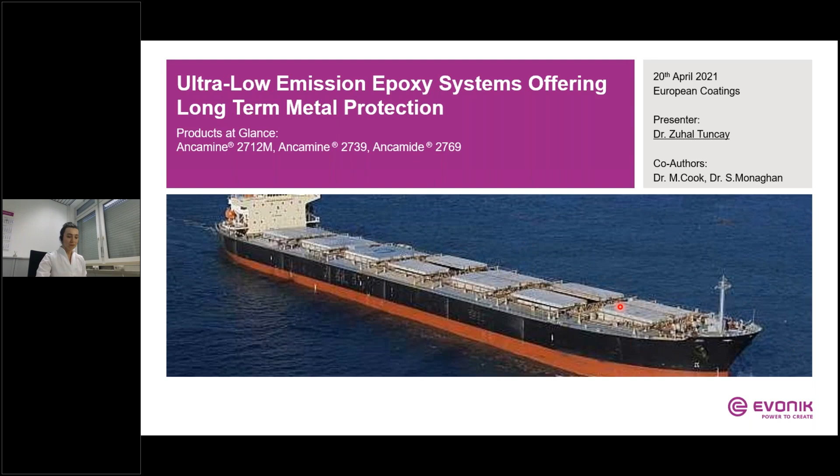Within the scope of this presentation, we will review general market trends and drivers within the coating industry and how those impact the innovation and development for epoxy coatings over years. Based on this, we will discuss the technical challenges the epoxy coating industry has been faced with. Then we will take 3 new products under the loupe and discuss how those new products support your formulation to meet environment regulation targets. The key features such as performance attributes will be discussed here. At the end of the presentation, I will highlight the benefits offered by those new products.

Let's take a look at the market trends and drivers. Requirements within the coating industry can be divided into 3 major drivers. Coating suppliers are being asked to provide eco-friendly solutions which enable their customers to enhance the performance and improve the productivity. Regarding the needs of environment, the coating industry asks for products with low or zero emission with improved EHS profile, where the use of harmful raw materials is avoided.

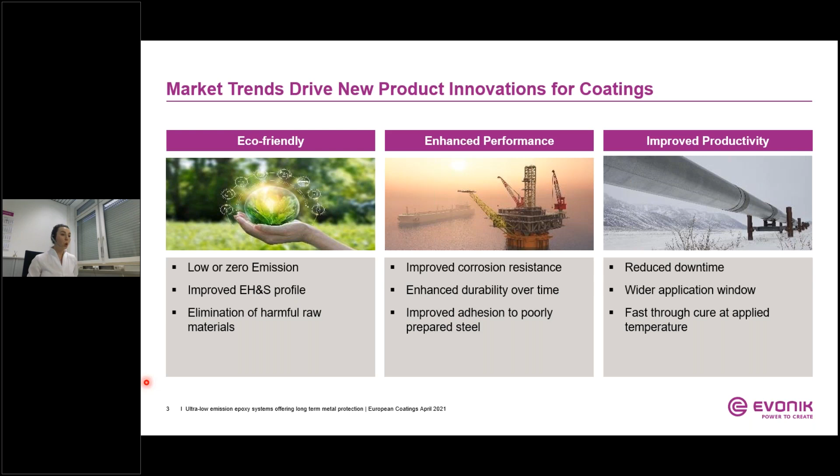Allow me to show you how the market trends have impacted epoxy coating development over the years. Since the 70s, solvent-borne epoxy coatings have had a successful track record. Typically, polyamides, along with solid epoxy resin, have been used for heavy-duty metal protection. The long-chain fatty acid backbone of polyamides provides a good combination of corrosion resistance, flexibility, and adhesion. However, polyamide curing agents are often high in viscosity and provide limited solvent and chemical resistance. Another limitation of this technology is poor low-temperature cure performance. Typically, polyamides remain sticky when cured at lower temperature.

Polyamides provide excellent pot life, allowing spray application for up to 6 hours when used with solvent-based solid epoxy resin. This normally results in coating formulation with a VOC content greater than 450 grams per liter.

VOC stands for volatile organic compounds. You can find different definitions for VOC between different regions and directives. Therefore, it is important to understand where the coating will be used when referring to VOC levels. For instance, according to the European Paint Directive, VOC is an organic compound having a boiling point lower than or equal to 250 degrees at atmospheric pressure. We refer to that definition in today's presentation when we use the term VOC.

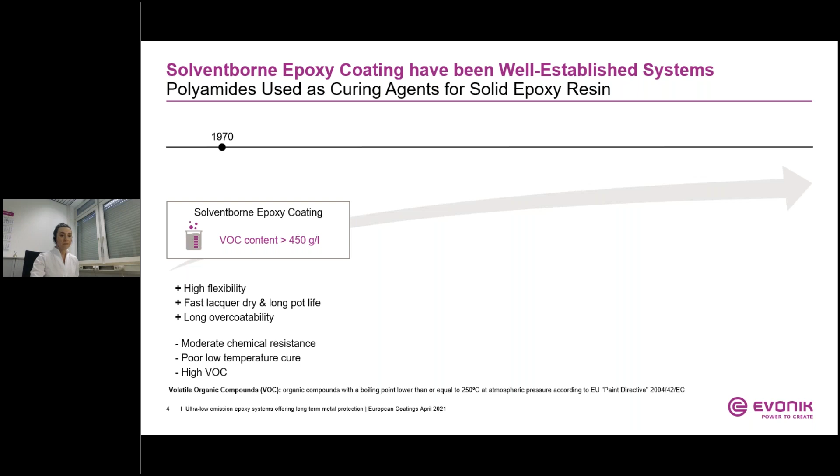So what happened is at the beginning of 2000, maximum VOC limits in coating application were introduced. Development work then moved away from traditional solvent-borne coatings to high solids, with the target to reduce emission levels.

When formulating at high solids, the most significant change is the replacement of high molecular weight polymers by low molecular weight alternatives, which naturally have lower viscosity.

Typically, for high solid coatings, Mannich bases or cycloaliphatics are used as curing agents along with liquid epoxy resin, which enables the formulator to achieve VOC content lower than 250 grams per liter.

The use of different chemistries for formulating high solid epoxy coatings has led to several performance benefits. Many cycloaliphatic systems can deliver improved low temperature cure since those curing agents react faster and have better compatibility with liquid epoxy resin versus polyamides. The use of lower molecular weight curing agent and liquid epoxy resin results in higher cross-link density of the cured film, which can improve chemical and corrosion resistance.

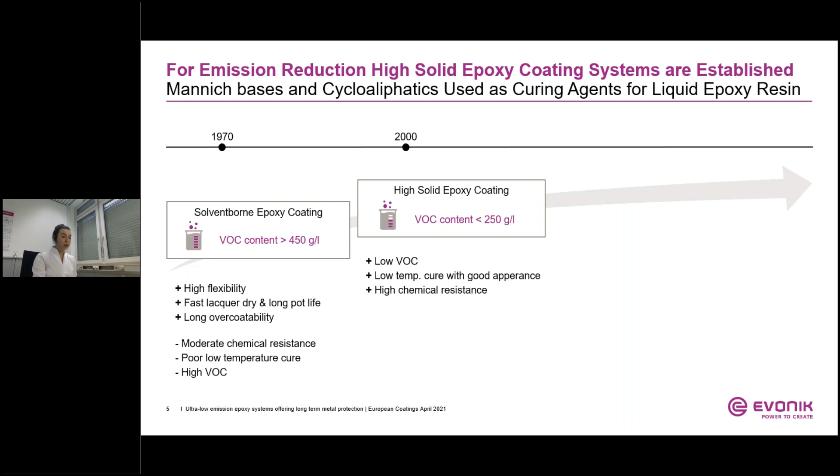But we have to keep in mind that the handling and performance characteristics of high solids are different than solvent-borne epoxy coatings. There is a negative impact on pot life coupled with an extension of dry time versus solvent-borne systems. In high solid systems, the polymeric network has to react and build sufficient molecular weight to reach the gel point, or dry to touch state, whereas solvent-borne systems are already high molecular weight polymers and dry to touch, or lacquer dry, as soon as the solvents evaporate from the coating film.

To ensure that the high solid system can react fully, the curing agents and epoxy resin are typically formulated with additional plasticizers such as benzyl alcohol. Those modifiers are also essential components to improve system compatibility, dry speed, and adhesion.

One drawback is that under certain conditions, those plasticizers have the potential to leach out during the service life of the coating. This can affect the mechanical properties of the coating and can lead to reduced flexibility. Consequently, the potential to lose performance is increased over time.

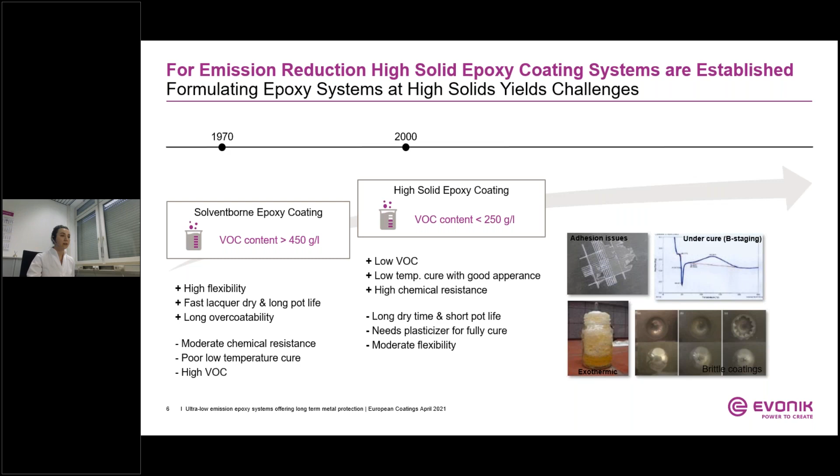So, next step. In 2015, another regulatory change was communicated, where the maximum VOC level of paint targets less than 100 grams per liter. As you can imagine, that was a huge challenge for the epoxy coating industry.

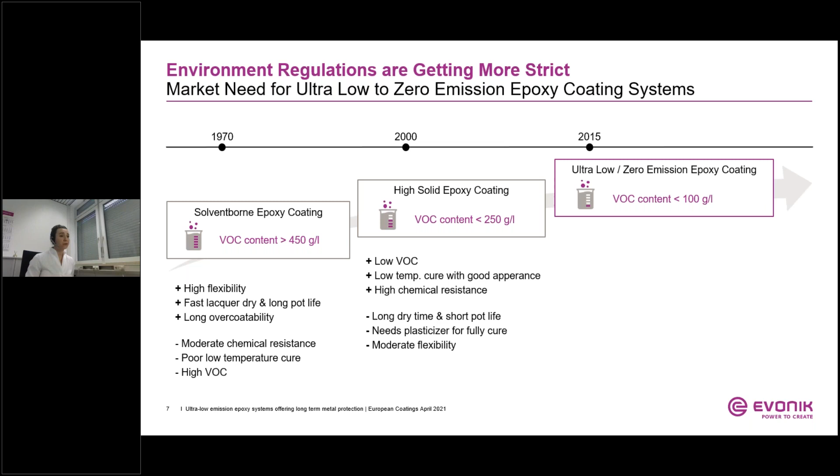Beyond meeting the market needs for ultra-low or zero-emission coating, coating suppliers were being asked to provide solutions which overcome the technical challenges of high solid systems, which means robust performance during the service life and a good balance of pot life, dry time, viscosity, and flexibility.

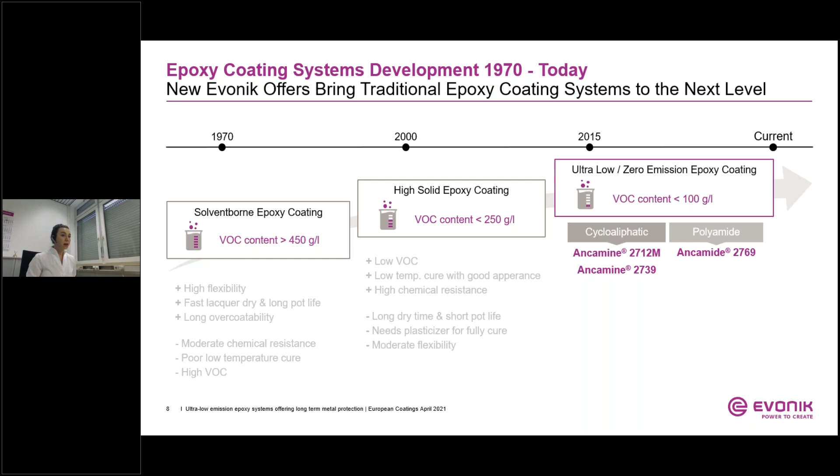To address those needs, Evonik developed new amine technology which allowed the design of both polyamide and cycloaliphatic type curing agents. In this respect, Ancamine 2712M and Ancamine 2739 have been developed to deliver properties and performance typically attributed to hardeners based on cycloaliphatic amines, while Ancamide 2769 has been designed as a polyamide curing agent.

So, while meeting environmental regulation targets, new curing agents provide many performance benefits. These include high compatibility with a range of epoxy resins, low viscosity while containing no solvent or very low levels of plasticizer, high durability over time, excellent through cure at ambient and lower temperatures, and high corrosion resistance.

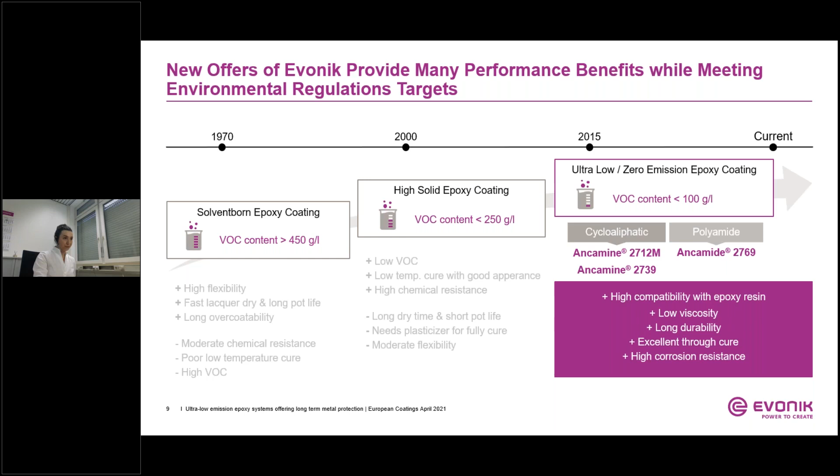As mentioned before, Ancamine 2739 and Ancamine 2712M have been developed to provide properties and performance comparable to cycloaliphatic amines. Now we are going to review their performance.

Here we will focus on handling properties of Ancamine 2712M and 2739. Both products exhibit very low viscosity, with Ancamine 2739 containing ultra-low levels of plasticizer and Ancamine 2712M being free of any liquid plasticizer.

While Ancamine 2739 has been designed to allow for a longer working life, pot life of 1.5 hours, Ancamine 2712M has been developed to provide coating systems with improved blush and carbamation resistance at lower application temperatures.

The basic handling and performance properties, including gel time, cure speed, and hardness development of clear coats, are highlighted in this table.

Both products have been formulated to provide a 50 pHr loading with a standard liquid epoxy resin. The unique advantage of the two products is the low mix application viscosity, achieved at lower than 10 grams per liter VOC, whereas the standard cycloaliphatic has a VOC content of 160 grams per liter due to the presence of benzyl alcohol.

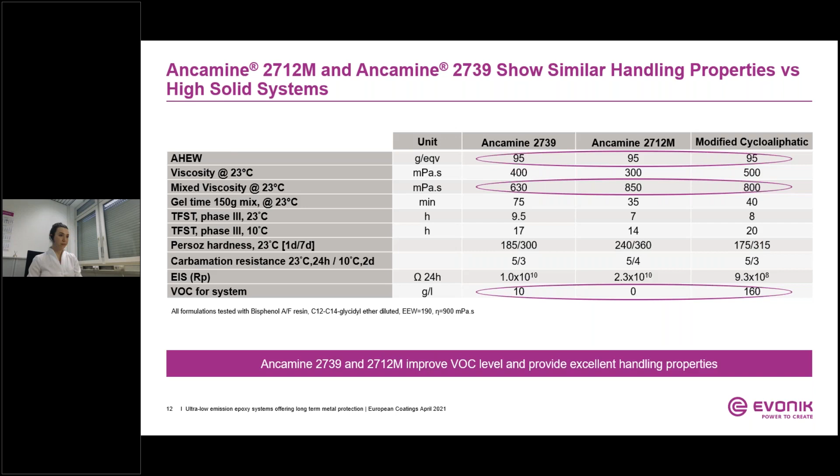Ancamine 2739 and Ancamine 2712M deliver a high degree of through cure at ambient and low temperature. To ensure a through cure without vitrification of the cross-linking reaction, the degree of curing over time was investigated here by DSC.

The data has been obtained after allowing the clear coats to cure for 8 hours, 24 hours, and 7 days. The figure on the left-hand side illustrates the degree of cure. The results show that Ancamine 2712M and 2739 exhibit rapid conversion with epoxy resin to almost full cure at ambient conditions within 7 days, without the need for a high level of plasticizer.

In the absence of plasticizer, the reaction with cycloaliphatics would stop after 24 hours, and full curing cannot be achieved. This demonstrates clearly that the cycloaliphatics need such a high level of plasticizer for a through cure at ambient to build their properties.

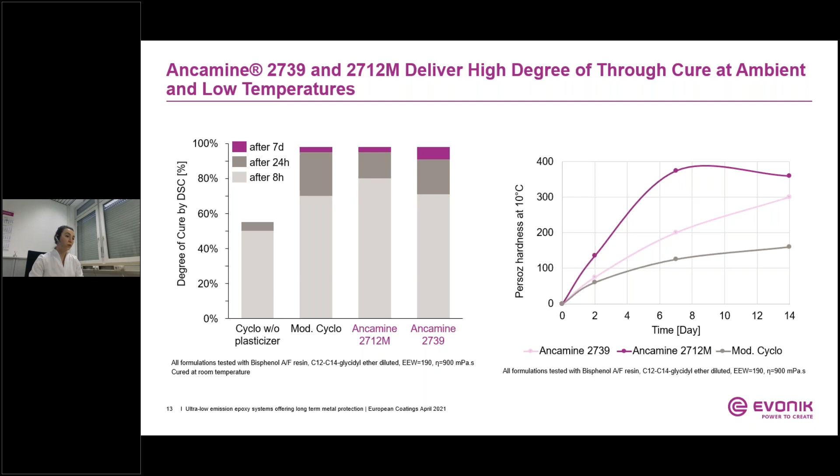A formulation based on Ancamine 2739, which has a very low level of plasticizer, shows very low level of emission. There are different ways to measure the emission. Within the European Union, you will find different directives for VOC control.

One of the national regulations is from Germany, called AgBB, which sets quality standards for emission levels. Based on the concept of lowest concentration of interest, the AgBB committee has set the interpretation scheme. This validates the accumulated emission at 3, 7, and 28 days after applying a coating in indoor applications.

To establish the emission levels of a formulation based on 2739, panels were submitted for emission testing following the AgBB protocol. The first measurement was performed after 3 days, cured at ambient room temperature. The figure on the left shows less than 1% emission of VOC components of the maximum norm.

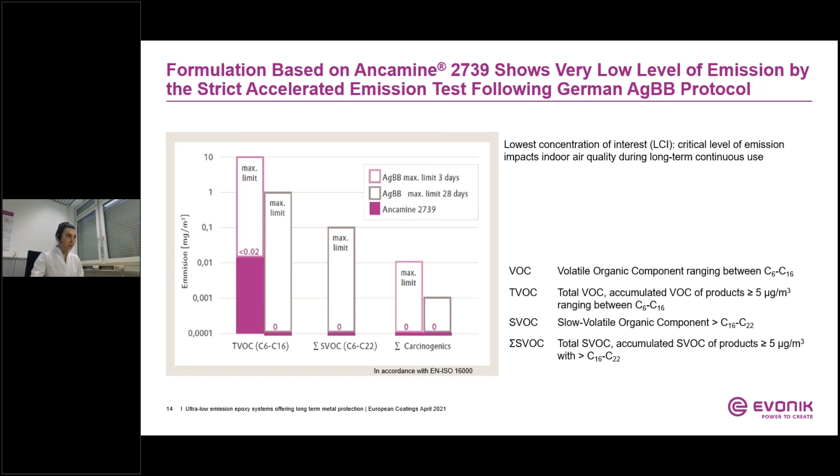Ancamine 2739 and 2712M provide consistent performance after thermal aging. To explore the durability of cured coating after thermal aging, two additional sets of clear coat panels were prepared. The first set was allowed to cure for 7 days at ambient temperature, and the second set cured for an additional 2 hours at 150 degrees.

The glass transition temperature, crosshatch adhesion, and direct impact resistance were measured. In all cases, the Tg of the first set was around 55 degrees, whereas the second set exhibited a significant increase in Tg in the case of cycloaliphatic amines. You can see cycloaliphatic amines have, after the post-cure, a Tg of 110 degrees.

Also, the crosshatch adhesion and direct impact test of cycloaliphatic amine were negatively impacted by the additional heating in the second set. The crosshatch test is rated for the first set with a 5 rating, where the second set got a 3 rating.

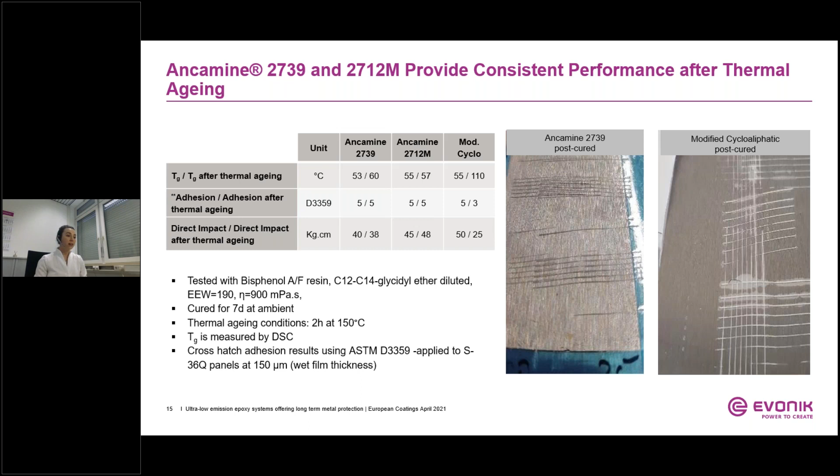In comparison, 2712M and 2739 based coatings show no performance changes after post-cure. Panels used for the cross-hatch test after post-cure can be seen in the picture on the right side as an example.

Ancamine 2739 and 2712M provide fast dry as measured by the thumb twist method, corresponding to 9 hours for Ancamine 2739 and 8 hours for Ancamine 2712M, which is comparable to the modified cycloaliphatic amines. Even without high levels of plasticizer, coatings based on this curing agent exhibit improved Persoz hardness development versus reference.

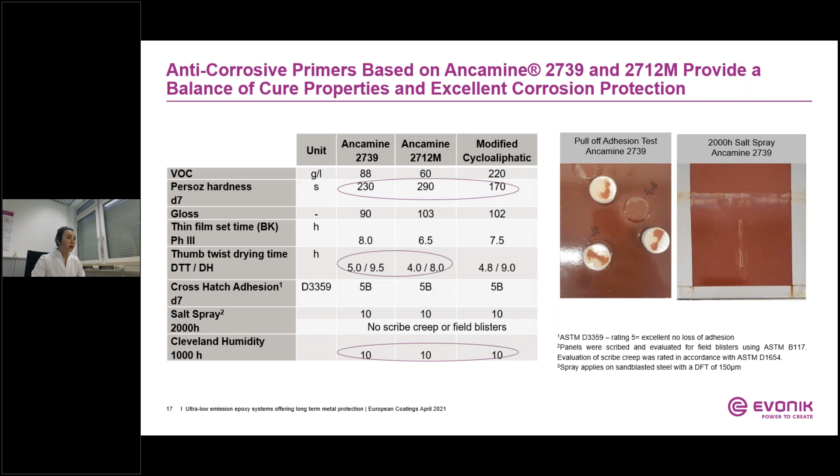All coatings provide excellent salt spray and Cleveland humidity resistance. The cohesive failure by pull-off test shown in this picture indicates good adhesion.

Now we are going to talk about the third product, Ancamide 2769. It is a polyamide with extremely low viscosity, and it contains no plasticizer and no solvents. We demonstrate here the handling properties and how this translates into the resulting coating system, a clear coat with ultra low viscosity at 100% solids.

As you can see, the viscosity of 2769 is 150 millipascal-seconds, and it offers improved resin compatibility without the need for further modification, which is reflected here by the high gloss in cured coatings.

Due to good compatibility of 2769 with liquid epoxy resin, no induction time is needed to achieve good surface appearance, and good surface wetting can be ensured. Even at lower temperatures, tack-free, blush-free surfaces can be obtained.

Conventional low viscosity polyamides exhibit poor compatibility with liquid epoxy resin and require an induction time before application. These products are usually slow to dry and give rise to tacky and poor quality films, often unsuitable for applications at lower temperatures.

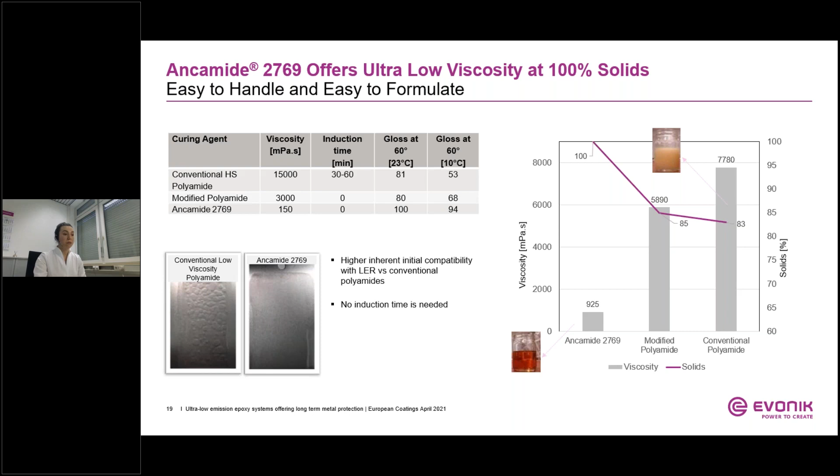To demonstrate the effectiveness of the new polyamide, the curing agent was formulated into an anti-corrosive primer. The formulation has a VOC of 85 grams per liter and a 2 hour pot life. The details of the formulation can again be found in our TDS, where it's listed what kind of pigments we use, which solvent, and at which level for this application.

The primer can be spray applied with conventional spray equipment immediately after mixing for 2769. This anti-corrosive primer formulation based on 2769 exhibits excellent corrosion resistance with minimal or no failures up to 200 hours in salt spray and corrosion test.

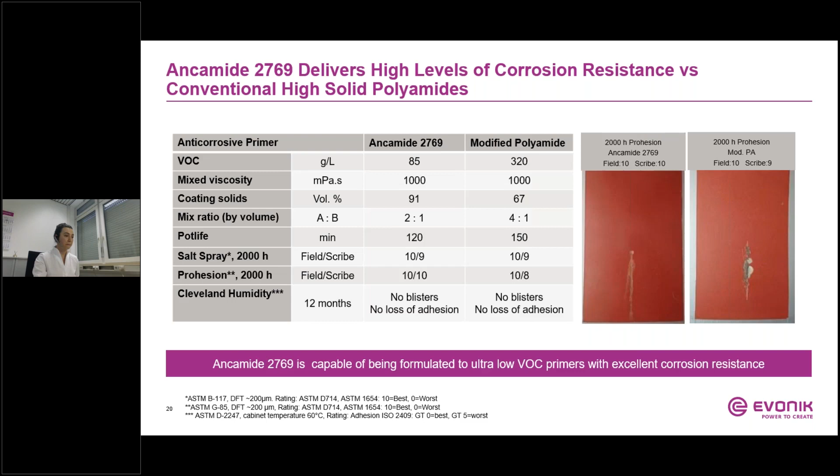Anti-corrosive formulation based on Ancamide 2769 also shows very good adhesion on poorly prepared rusted substrates, where the pull-off test we performed indicates 6 megapascal strength.

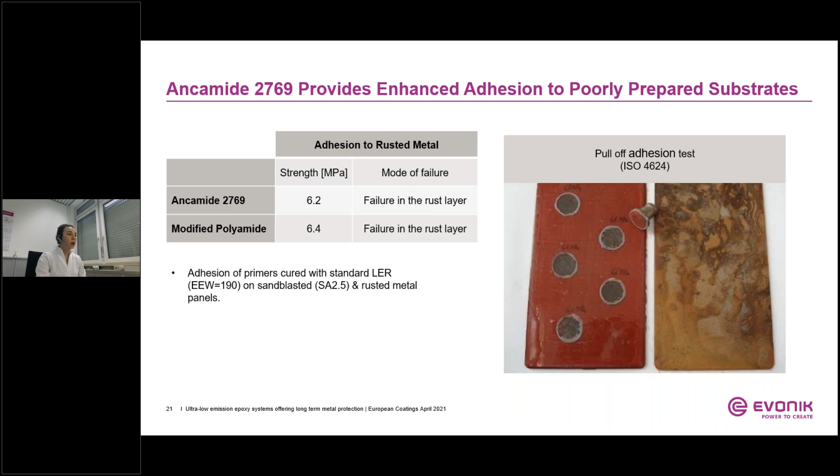So let me summarize the results. The ambition to develop this new curing agent was to create a sustainable solution across all coating areas, but especially in marine and protective applications where environmental regulations can be most demanding.

New innovative curing agent technology allows us to reduce or even eliminate VOC in paint formulation, which minimizes workers' exposure to hazardous chemicals during application.

Beyond very low viscosity with little or no plasticizer, the new curing agent shows high compatibility with liquid epoxy resin, allowing good surface appearance after curing.

During the presentation, it has also been shown that due to the absence of non-reactive plasticizer, the coating is more thermally stable and will retain high performance during its service life. This will extend the service life of structures and equipment, which additionally reduces their overall impact on the environment.

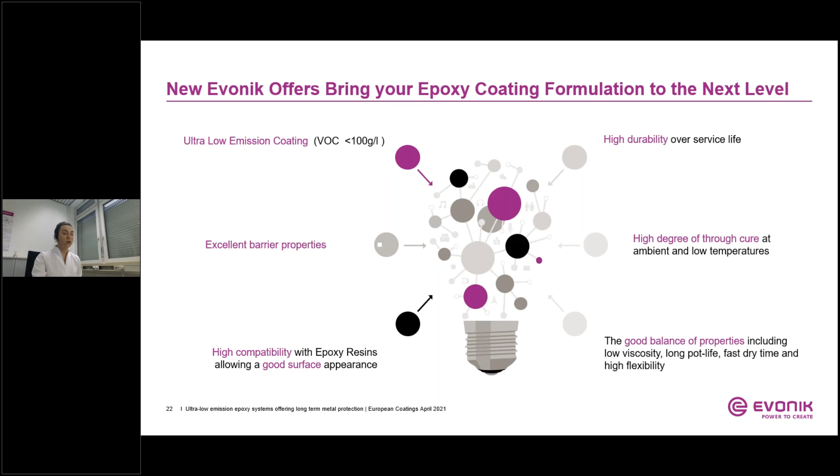Now we are coming to the end of my presentation. Please allow me to summarize the key features of each product.

Ancamine 2739 and Ancamine 2712M provide properties and performance comparable to typical high solids hardeners based on cycloaliphatic amines. 2712M has been formulated to provide a coating system for fast cure with improved blush and carbamation resistance at low temperatures, whereas Ancamine 2739 has been designed to allow for a longer pot life and overcoatability with improved UV stability.

Looking at Ancamide 2769, which is a very low viscosity polyamide with high flexibility, we can get high corrosion resistance and excellent adhesion on poorly prepared surfaces.